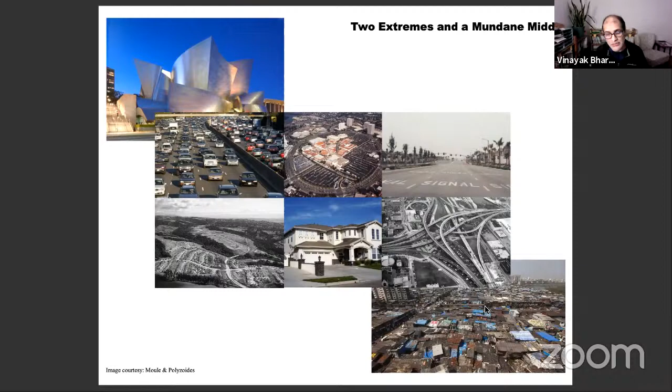So how did we get to this place? If we're sensible architects that went to schools and studied and got degrees, even the greatest universities in the world, right, produced all these wonderful architects, how the hell did we get to landscapes like this where nothing is sustainable, nothing is ecologically meaningful? This is a toxic landscape. And the worst part is it even happens in the most regulated societies in the world. It's not happening by accident in some poor countries.

This is happening in the most rich countries, the most regulated countries in the world, not as accidents, but as legal means. The sprawl is legal. Just think of what I'm trying to say here - this is scary. Sprawl is a legal phenomenon happening because the rules, the laws we have written are systematically allowing people to create landscapes like this that are self-destructive. So if we, as professionals who understand the built environment more than others, have the ability to reverse this, to advocate for the reversal of this, that's incredible. It may be easier said than done in some societies than others, but the process has to begin.

So one of the things we've done in our practice is launch a campaign to talk about these things along with our colleagues. The good news is that for the first time, the whole idea of the architect with a capital A, round glasses and a black robe, is passé. That's gone, thank God. Because what's happening right now is municipalities, at least in the US, Europe, and hopefully India as well, are waking up and recognizing that the way they've done planning, the way they've allowed architecture into the city, is not making anything more than individual buildings.

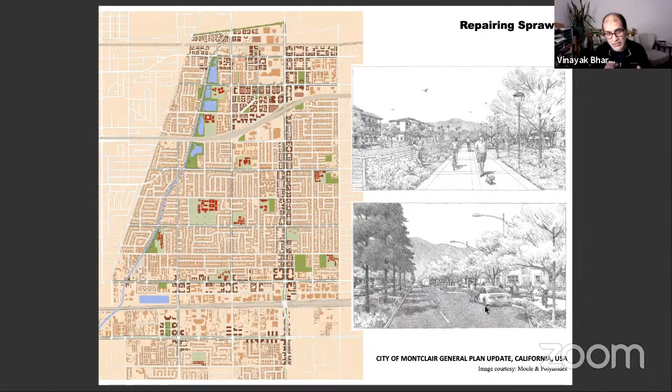This is an urban design vision citywide. I don't want to get into details, but the point is it keeps certain aspects of the city intact. It talks about a green armature for the city, prioritizes projects, and really begins by telling the city that private development is not the way to begin. If you want to transform a city, private development is difficult because it relies on private developers, private money, etc. The way to transform a sprawling, toxic landscape is through changing the public realm, the public space of your city, because that's within the domain of the municipality.

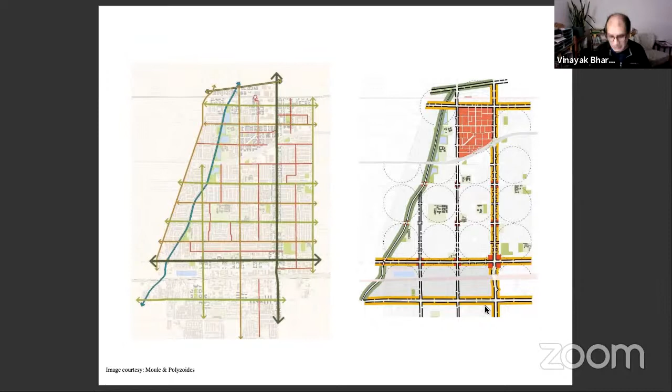So you create a robust street network. One of the things we've realized is that streets, one of the most underestimated aspects of our cities, are in fact the most potent engines to transform the places in which we live. Streets have been destroyed by traffic engineers because they were taught in school that the only thing you need for a street is cars, and they forgot that streets were meant as outdoor living rooms for pedestrians and cars and all the other members of our city, including trees and birds. How can you take the most ubiquitous space in our cities, the street, and make it something incredible?

So here is a simple project. This can happen in any city - there's no rocket science about this. This is a very modest city in California called Lancaster. In 2010, during the economic downturn in the US, they invited us to take this street, their historic street, which you see on top in the photographs.

The dimension of the street is 100 feet from building to building. It has 5 lanes of traffic - note how wide those lanes are, note how empty the street is. It looks like a COVID-19 street during the lockdown. There's no investment, it's very disinvested. So where do we now invest the money they got as a grant to make something wonderful out of it? What we did is something very simple - because there's a grid of streets around it and traffic can be distributed, you keep the curbs, you do not break the curbs because that's where the underground infrastructure is.

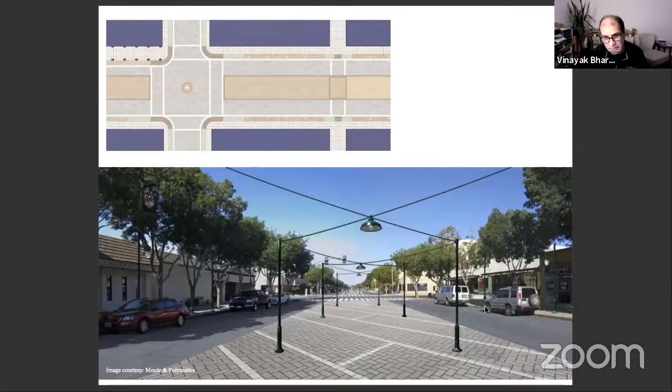You keep the sidewalks, you keep the parking. You take the middle lanes and make it a pedestrian zone which is porous, because the water can now go into the ground. You harvest the water, add lighting, and make it a shaded zone since it's a very hot climate. This space can transform into something as wonderful as this.

Now, this is nothing new. This has been done in India. It's happening everywhere—that's the good news.

The most wonderful thing about this project is that after we finished our design, the city took it and implemented the whole thing in 8 months.

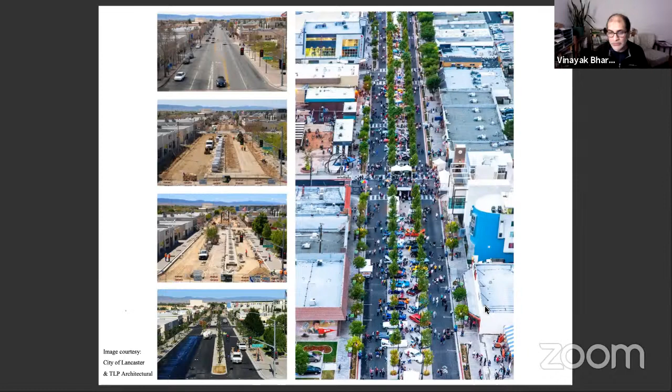This is a very important point, because none of us in our firm can claim sole credit for this project. We did one part of it, but the other part was the implementation and follow-through. My point is that the eventual success of urbanism doesn't come from an architect or a designer alone. It comes from the collaborative process of important visionaries who follow through and carry the project forward, keeping the core ideas of a vision alive.

This is the Christmas celebration and the weekly farmers market that today happens in this street. And the other beautiful thing that happened within 3 years is that because this street became the iconic heart of the city, developers came wanting to build housing here, people wanted to live here, and the city invested $14 million and reaped back more than $300 million of investment.

Investing in public spaces is not just about making places alone. It is a wonderful economic strategy. It's a social strategy to bring people together, because it's also a way of making cities inclusive. When you have public spaces like this, and design housing intelligently around it, people of different income groups can now stake a claim in a common space.

Whether I own a Maserati or I'm living in a small apartment, it doesn't matter what my income is. It's like a beach in Goa—when you go to the beach, it doesn't matter if you're rich or poor, you enjoy the beach nonetheless. Giving people the same right in a city through public space is of the absolute essence of making cities more equitable.

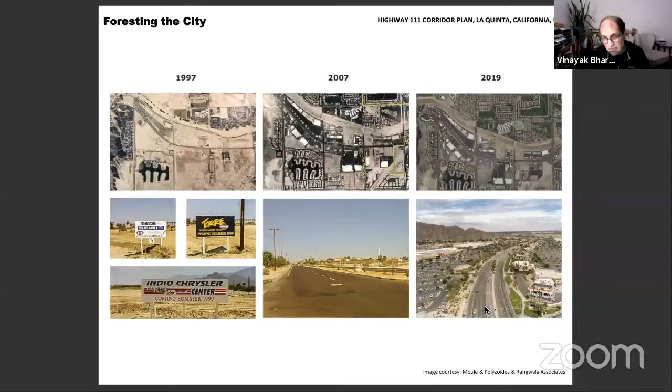The second issue is about ecology. You have sprawling landscapes where the ecological index is absolutely minimal—these are landscapes, particularly regional highways that connect one place to another. This is a classic case showing the chronological advance from 1997 to 2019 of how the presence of a highway attracts boxy development with parking lots in front of it, destroying the landscape to make it a sea of asphalt.

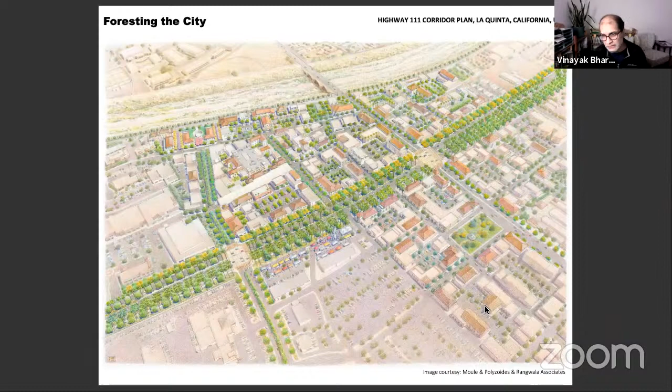So the other important agenda, which some of the more interesting landscape architects today have called 'foresting the city'—a term I love to use—is saying instead of the forest being outside the city, let's think of the city as an extended park, an extended forest. Taking these conduits, which we've thought of only for mobility, and planting them with incredible trees, making them boulevards and wonderful parkways with trees, birds, local ecology, and harvesting techniques becomes of absolute essence. They become the scaffold around which sustainable development can happen.

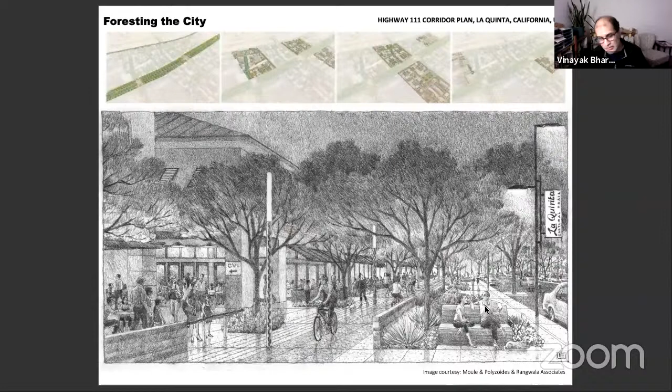Here are examples of this. Now the same is true when we think about freeways. Across the US, there is now a concerted campaign to rethink the damage that freeways have done in our cities.

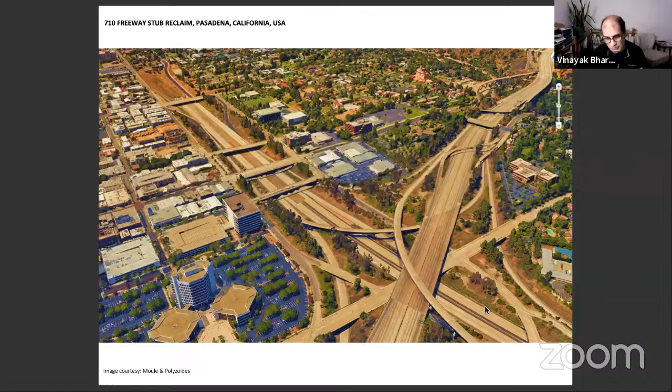So this was a project where like-minded citizens in Pasadena, not architects—though some of us were—came together and met for about 3 weekends, creating a vision for this place. A simple diagram produced in a weekend said: instead of having a crazy cleft, you can take traffic through this place by making it a magnificent boulevard, bring in new development, and stitch the city together. Through the concerted campaign of this neighborhood association, we actually managed to block the freeway from happening.

So citizen activism, combined with all the expertise we bring as architects and economists and other fields, can actually be a potent tool for changing the way we think of how we live in our cities.

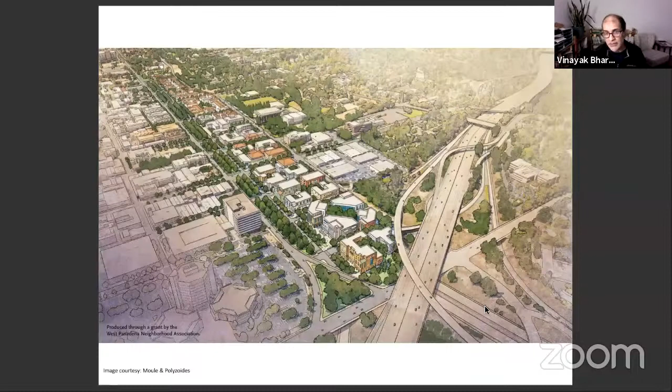The idea of foresting the city also has implications on conservation. This is a project in Panama. It's a very interesting project because when we think of conservation, we often think of it at various scales: the scale of the building, the scale of a district. What about the scale of an entire historic city?

Now, when you think about it as development on its own, that's one way of thinking about it. But the other way of thinking about it is that it's an extension of the city. In other words, if you can really think of a pilot project that can become a model of how to extend the growing historic city, and then becomes a model that you can replicate, not in form but in strategy, now you can create something wonderful.

So what we did is we started this exploration through landscape, not through architecture. We brought in an ecologist and a landscape architect, and we documented everything that was going on in terms of the ecosystem of this historic town.

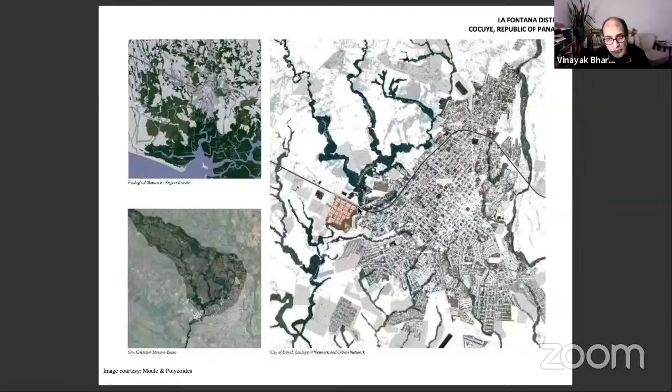This is the development in the picture, and you can see that a ribbon of forest goes around here. So we had a choice whether to obliterate this forest or whether to keep it. What we ended up doing is we kept the forest, obviously, and we converted the highway into a massive boulevard. So I'm talking about foresting.

And what you see here is a self-sustaining district, which has a park, a park, a park, and a fourth park in the forest. It has a promenade that takes you through to the heart of the town center.

And the advantage of doing this is you can now phase this and build it as the first phase, where everyone has a piece of this. You can phase that, you can phase that, you can phase that.

All of this is based on traditional precedents of urban design. This is not rocket science. We visited Charleston, we visited some beautiful pre-war towns designed by the Spanish. We looked at some of the lessons, and that's the inspiration for this place.

Now, the most beautiful thing about it is we then began to look at the forest. Our landscape architect went into the forest and documented all of the trees that were native to the flora of the forest. And what we did is that all the streets you see here are now carried on as designs that extend this native landscape into the town.

So what you're doing basically is creating street sections and public realms, like I showed you, by bringing this into the town. And the result, of course, is that now you get a development that is not the kind of sprawl that you see here, but a development that is self-sustaining because it has retail right here, it has an office program right here, it has a residential neighborhood right here. In other words, if you live here, there's no reason for you, unless you really want to, to get on the freeway and go into the city.

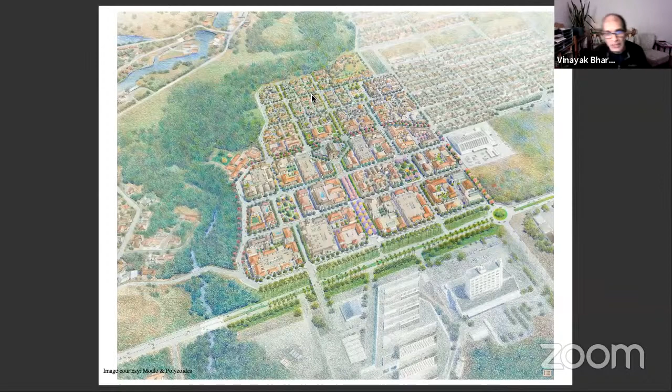You can have all your daily needs within the idea of this district. It's a walkable district. Now imagine a model where this historic city has neighborhoods that are self-sustaining all around it, with streets that bring in the natural flora, stitching broken nature. So this is a model. It's actually broken ground, and we hope that they will carry this idea through.

What he wanted to do originally, as they always do, and you see this happening in all parts of the world, is destroy everything that was in there, divide it, subdivide it, sell these, make the money, and go away. What we managed to do, and a lot of credit goes to the client here, because eventually you need a person to make these decisions, is we eventually managed to give him the same number of units, but actually clustered in the form of hamlets, while keeping the forest and the agriculture completely alive.

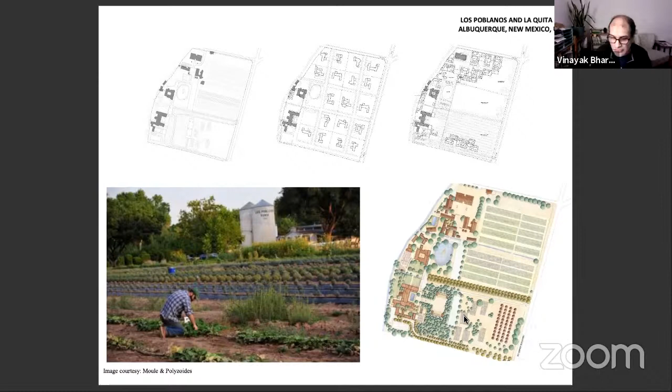Now imagine estates outside all our cities, particularly in India, because you have so many beautiful ones with plantations, etc., doing this, where you actually bring in development because that helps keep the economy going, but you do it in a way and form that creates covenants where you will preserve nature and agriculture for posterity. This is a choice we have. It is not an easy sell, it's not business as usual, but we must try to convince people to actually do it. And that's the aerial of the estate, as you see.

Transit. Many of you know this. It's a wonderful thing. It's picking up in India beautifully. Transit is a great blessing for us.

There's a lot of talk about what's going to happen to transit during the COVID conditions, but my answer is very simple. You and I can afford to sit in our cars and go wherever we want, but there are millions of people all over the world that cannot afford a car. Transit is their only option.

So imagine taking transit as a very important catalyst in the city and taking our transit nodes, whether they are bus stops or train stops, and investing money in these places. Why? Because transit stops are places where the rich and the poor, the old and the new, the children and the older generation, they'll all come there in some place or the other. So why would you not make these places the most beautiful so that everyone can enjoy them?

I mean, this is such a simple thing to do. It's happening in so many parts of the world beautifully. So transit-oriented development, or whatever you want to call it, essentially is about visioning places around transit stations that are absolutely beautiful. This has implications on urban design.

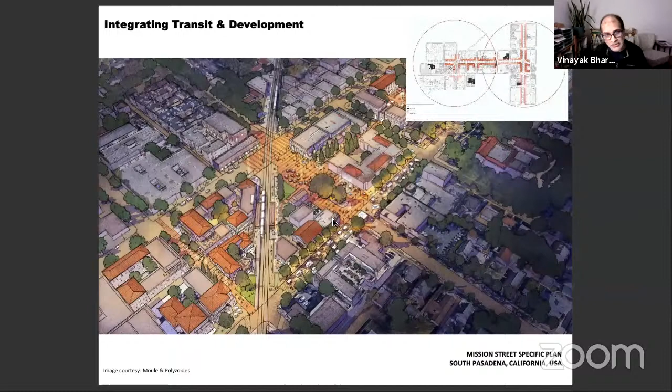This is an urban design proposal for one of the transit stations in South Pasadena in an American city, but it also has implications on architecture. Because what you want to do is also densify housing and mix of uses next to the transit station, because the whole incentive of living next to a train or a bus stop where you don't have to rely on your car is a wonderful thing.

So if you can bring in density in forms that are contextually responsive, that they don't obliterate the surroundings, they don't destroy the character of a historic neighborhood, etc. This is a project, a very difficult project we did about 10 years ago now, where the existing zoning of this city was not ready for transit-oriented development. So the buildings were only supposed to be 4 and 5 stories tall around a transit station per the zoning rules of the city.

What we said to the city, and these are graphics we had to show them, is if you do it at 4 and 5 stories per your rules, you're going to get a building that looks like this. Now this is not urban design. This is some architect coming and making what we call a pancake building. It's a stacked building which maximizes your FSI, and then you create courtyards to bring in light. And then, depending on how talented you are as an architect, you put all kinds of games on it and some windows and some tricks, and you call it architecture.

If you're doing urban design along with architecture, you are now looking at what's around it, what's behind it, what you want, what's the pedestrian scale, how you want to create mixes of uses—all that kind of stuff comes in.

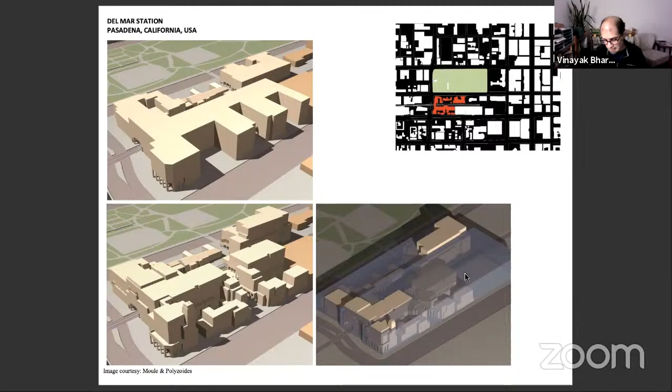In this case, we got as many as 10 variances on this project, and here was the other complication: the train lines went through the middle of the project.

When you have a train line going through the middle of the project, this amount of land is actually owned by the metro authorities. It is not owned by the developer. The developer only owns that and that.

Because of the amount of parking, we had to go 4 levels underground. This is a very unique moment in the construction of the project—you can see the parking being dug. It's a very expensive proposition because you cannot dig the whole thing. You have to leave this intact, which means you have to shore here and shore here as well.

Note that the train was going to be active in 1.5 years. So construction of the little tunnel, the gateway through which our train was going to pass, is the only portion of the building that spans the tracks. We are constructing it along with a parking garage.

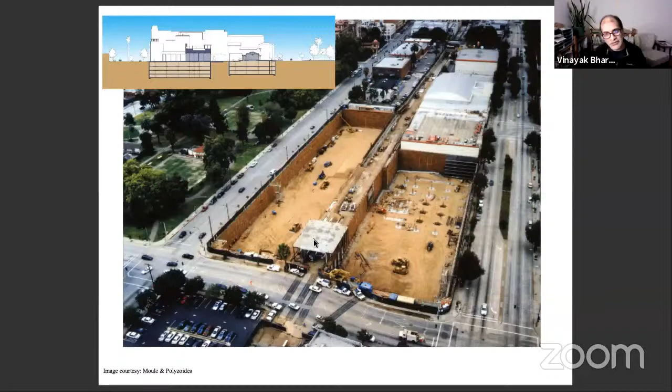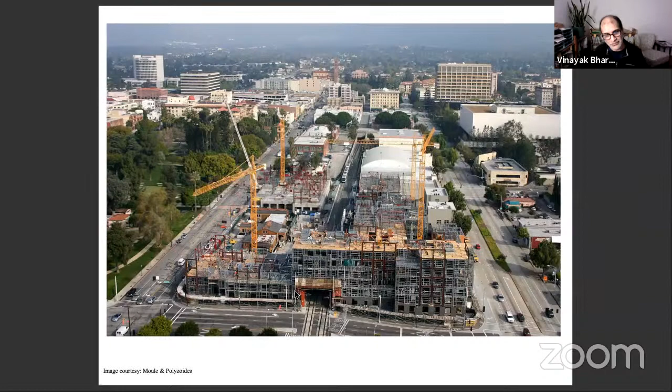Here is a shot where the train is active and the steel is being poured around, and the building is under construction. You can see that the tunnel, that portal which was being constructed originally, is now completely finished. Finally, in another year or so, the entire project was built.

What is interesting about this project is that this little building you see here was the original station in the 1920s where people got down on this train track. I don't know if you know this, but Los Angeles, surprising to many people, was one of the world's most important transit cities in the 1920s and 30s. It had 1,000 miles of train tracks.

By the time the freeways began to come in, with the rise of the automobile, systematically these train tracks were dismantled and replaced by freeways. So all of these historic train tracks became abandoned places, and this station, which once had so many memories in it, was lying in ruins.

So what we ended up doing as part of this transit-oriented development is taking this building—we moved it to the park, dismantled it, restored it, and brought it back as a restaurant. So this is a historic project that conserves this building with 350 units of housing right in the middle of a train station around a plaza.

And that's the building from the outside. You can see the station going through. These are all apartments where people live—there's a train going right through the building. And here's the restored project with the plaza, with the trains whizzing past.

Now we come to another subject: affordable housing. 1.2 billion people don't have adequate shelter. What do we do about it?

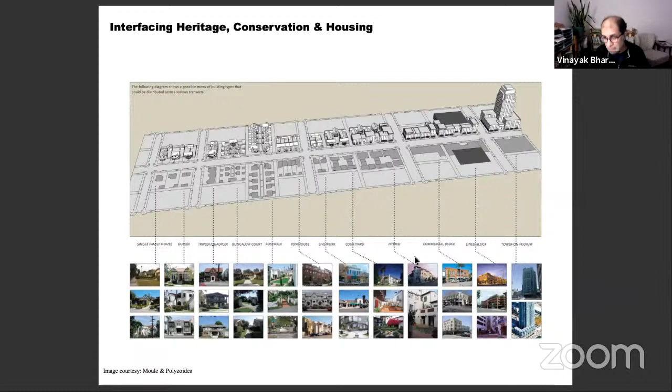I want to take you through some projects that straddle conservation, affordability, everything. The first one is really about saving old houses.

If there's one aspect of architecture about creating things anew, there's another aspect that's simply about not letting build-and-scrap practices go on. We live in a world where we cannot afford build and scrap - there's too much waste already. So if you have houses that can be salvaged, that can be moved, if houses have to be demolished for new development as cities upzone themselves, can you take these homes, move them to other places, and really make something out of them?

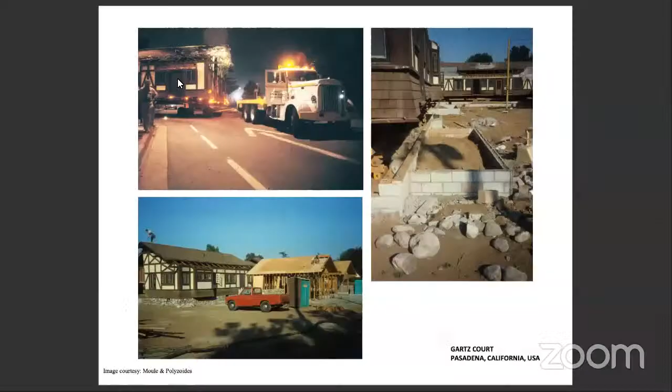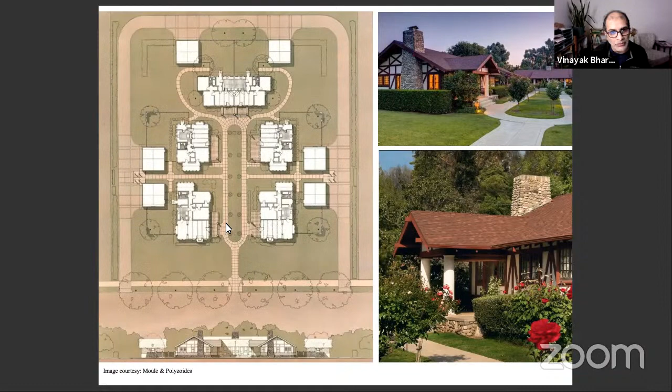This is a historic project where, in the night, houses were taken on a truck to another site and put on new foundations. There are 6 homes, 6 bungalows made out of wood. Garages were added, yards were added, and they're arranged in a simple configuration around a common court. The result is an absolutely simple project that can house people right in the middle of a single-family neighborhood.

So what could have happened didn't happen, because you salvaged it, added chimneys, restored this project, and made new housing out of it. My point is that new housing is not new in terms of design alone. New housing can establish continuity by salvaging historic material and recasting it in new forms. The same can be done by amalgamating it with new design.

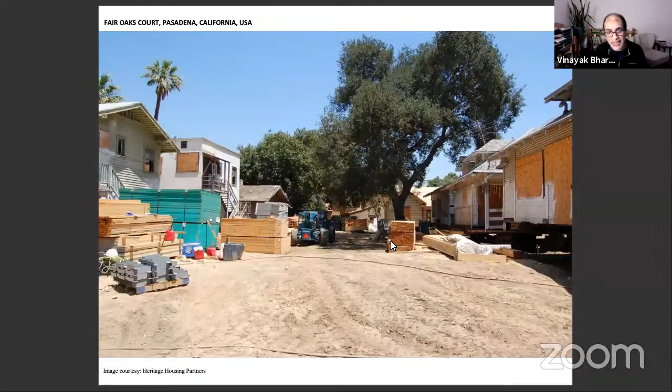Now, this is another case where existing houses on a site were maintained, kept, and restored at the back. These houses you see right here are right there, all restored around a common court. In front of them, new housing is built from scratch, reviving the best traditions of Southern California houses in the craftsman style.

So this is new, this is old, and the amalgamation creates complex housing, because you now have people who are low income, mid income, workforce, etc., living on the same site and meeting in the same place - which is what inclusiveness is truly all about. Inclusiveness is not about taking the people who are poor and shoving them into one part of the city.

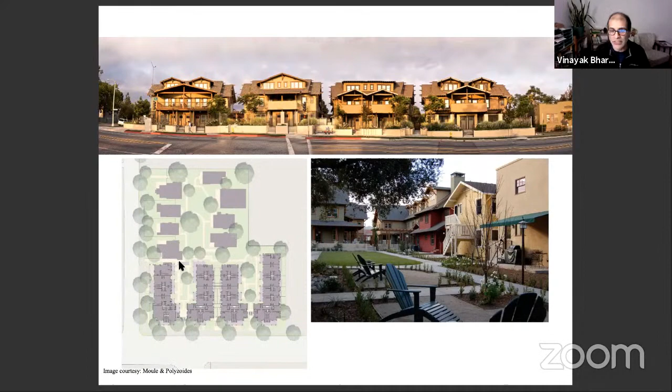Inclusiveness is about creating housing where people of different incomes can live together, sharing the same space. The third idea is to revive traditions based on climate and ecology.

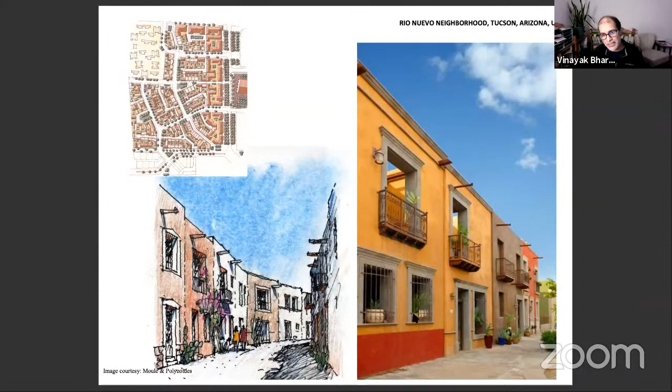So what we ended up doing here is we told the builders, we're going to design with you, with the production builders, just the facade of the street. The architects can design the house behind it. You can do whatever you want, design the most creative house you want. But the production builders should come together and work with us to create some semblance of what the street might become. So this was a pilot where we built the walls, and behind them the architect actually designed the homes, and the result is actually quite wonderful. A few of these houses have been built, and you can see the exterior facade is all that the urbanists actually control, while the architects end up filling it in with all kinds of creative housing.

We now come to a beautiful typology in Southern California called courtyard housing. Courtyard housing is not new to India. In tropical climates, the incredible wisdom of living outdoors has been known to us forever, so this is nothing new to many of you. But it surprises me that we forget many of these things.

I don't have to remind you, some of the most intelligent architects of the past generation in India reminded us of this constantly in their work and in their writing, and they need to be acknowledged. So this is nothing new to many of us.

But nonetheless, in Southern California, for example, there's a beautiful tradition. When the Spanish colonized Southern California, they brought with them Mediterranean precedents. One of the precedents was, instead of living in buildings with corridors, where you go into a lobby, up an elevator, cross a corridor, and into a unit that is not ventilated, you actually have a building with no corridor. You arrange the units so that you have courtyards that are not just spaces between buildings, but actual gardens that are outdoor living rooms where you spend most of your life.

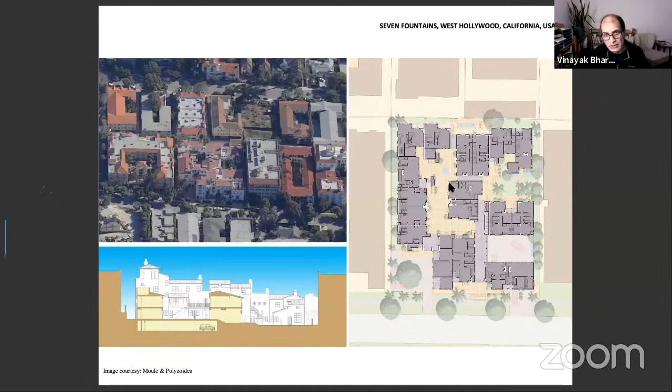The result was wonderful, I think, because we managed to create and revive a substitute to what could have been a conventional apartment building. This building is obviously a homage to the great Mediterranean traditions of Southern California. A very simple building of stucco homes now broken into individual masses. Instead of creating the image of a large single building, you break it into a townscape. That's the whole idea—you break this into smaller units. That's the beauty of the villages that we love, at least I think.

This is the entrance. You walk through this passage, and these are the courtyards. This is just one of them, where the courtyard is an outdoor living room. You have a place, a fireplace where you sit down. You enter this unit straight through the ground, or you climb up the stair to go to your unit above.

Again, a different typology that now eliminates the idea that stacked housing is the only choice we have to live today. The other tragedy—and this is a science that can be applied at any scale.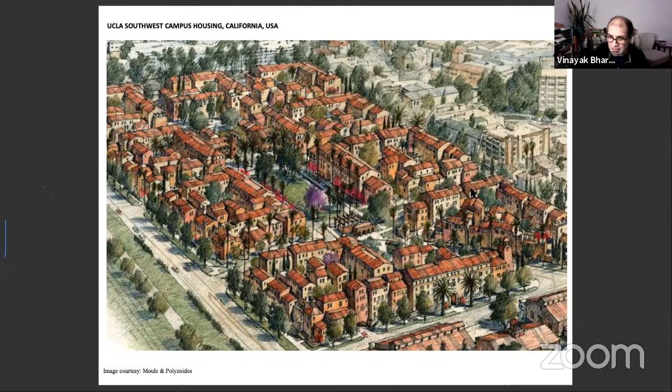Now, these are all things that are known amply in India, right? Because we don't have the energy, we don't have air conditioners, poor people cannot afford it. So these sciences exist in India. Some of the best housing projects in India have done this so beautifully. So these are things that need to reach the least common denominator of architecture. It shouldn't be a handful of elite architects talking about this. That's ridiculous. If only 2 or 3 people talk about this and we worship them, then nothing has come out of it. What we need to do is take these sciences into the schools, teach students about why these things matter, how to craft these ideas, because that is the way we're going to transform the way forward.

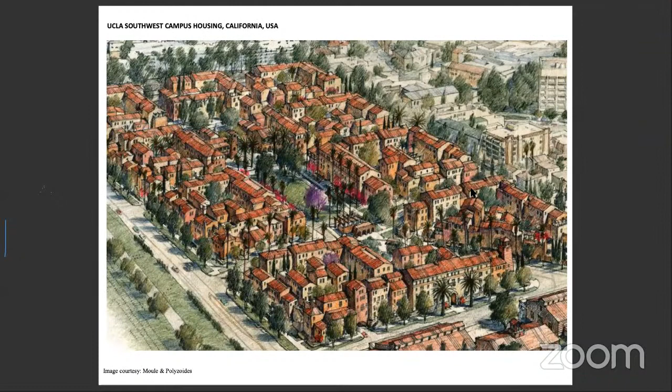My second book was on Asian cities. When I came to the United States, I began to realize that the paucity of scholarship on some of the oldest cities in the world was appalling. I mean, think of the great irony. For those of us that had the privilege of studying in different parts of the world—I can speak for Poonam here as well—you go to the West and you begin to realize that there is so much scholarship on Western cities, but the oldest cities in the world are not in the West. The oldest cultures of the world are not in the West; they're elsewhere. The oldest heritage in the world is not in the West, it's elsewhere. And yet we don't have enough scholarship on it. So there are now, of course, many scholars who are thinking of this, and that's a wonderful thing. And obviously, there's also a geopolitical shift, and Asia has come to the forefront. Latin America has come to the forefront, so that's wonderful.

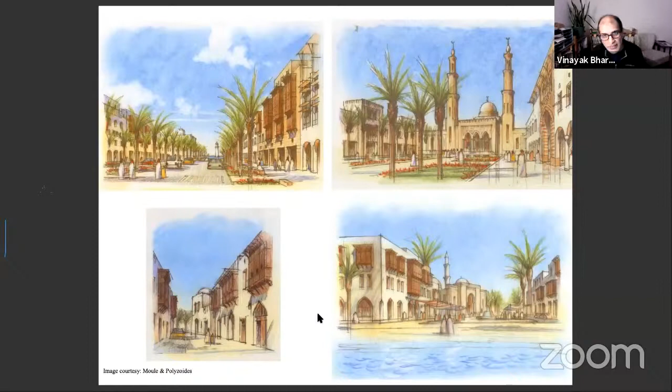Production housing is one of the debacles of housing, where cheap developers take the same house and multiply it for acres of land. But you can actually shift this rubric very easily.

We tried to do this in Dubai. This project did not get built, but what we tried to do is, I remember going to Dubai and asking my friends to take me to see what Dubai was before it became a mega city. My friend took me to Bastakia, the last surviving fragment of historic Dubai, where there are 20 or 30 houses with cooling towers. I was completely taken by the charm of these houses.

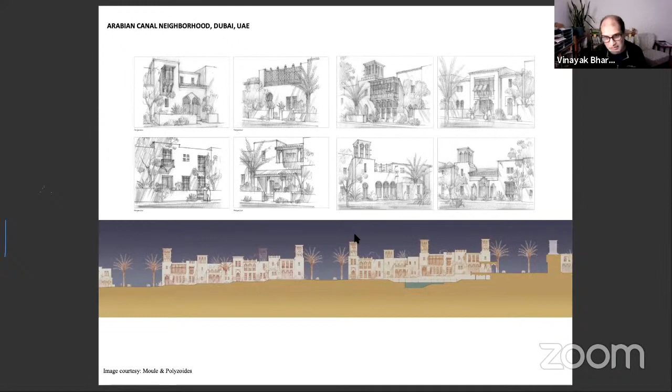So we tried very hard to bring some of these ideas into housing. Here was production housing: all these houses you see have the exact same plan. All we've changed is the outside. They all have cooling towers in some form so the air escapes out. When you bring them together, you get streetscapes and townscapes that revive and keep a link to a past these amazingly wonderful places have forgotten. Not only are these buildings simple and sustainable, but they take you back to a side of the story that has been completely obliterated, for what reason I do not know. I'd love to discuss this with all of you today.

This is another incredible project we did for the Bohra community, a minority sect of Islam, a wonderful Orthodox sect. We had the privilege of being invited to compete for one of their campuses in Nairobi, Kenya. I don't want to get into details, but what's beautiful is that the mosque is the center of the campus, right in the middle.

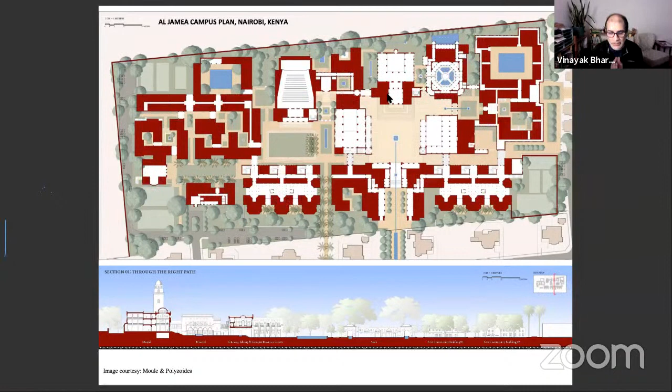These are the dining halls, the classrooms are there, and because of gender separation, which is the most rigorous and important thing for them, the men's dorms and classrooms are here, the women's dorms and classrooms are here. The men walk on the ground to the mosque each morning, while the women come from the top through a bridge to the mosque. It's an incredible way of respecting the cultural genomes, meeting them where they are, and creating a language of architecture that is entirely theirs. We worked with many community members to craft this architecture rather than abstracting it.

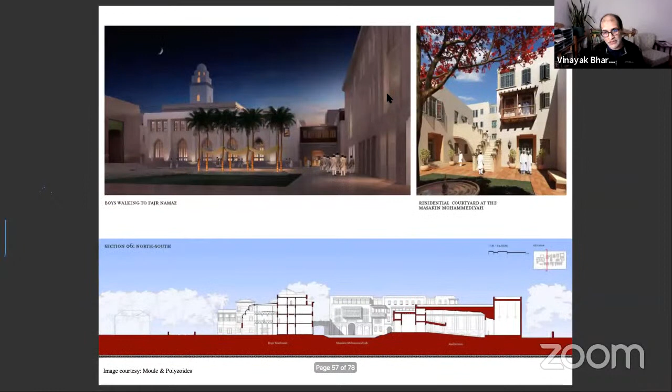Fifteen years ago, I had a student from Persia who spoke Farsi. Our collaboration resulted in a wonderful study where we rediscovered this wonderful city called Yazd, the epicenter of the Zoroastrian faith, where the fire of that faith burns. I knew about Yazd because it was a World Heritage Site, known as a city of wind towers. But what I didn't know, which we excavated and wrote a paper on, is that the wind tower was essentially the end of a long regional infrastructure called the Qanat.

The Qanats were subterranean water channels that brought water from the aquifer of the Zagros Mountains under the earth into reservoirs called Abanbars, then into the mosques, and then into the houses. This was an incredible piece of heritage that existed, yet for years it went completely unnoticed. Finally, it gave me such happiness to find that three years ago, UNESCO recognized the Qanat as a World Heritage Site.

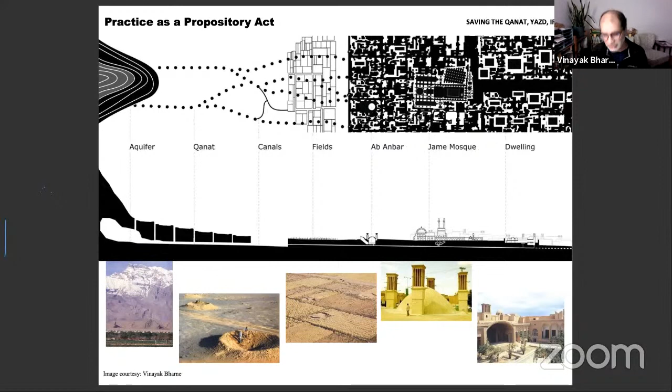There are so many such vernacular infrastructures that exist all across the world. They do not have a voice, they do not even have an eye—nobody has seen them, nobody knows about them. I'm showing you this because one of the great responsibilities we must carry is the ability to excavate these ideas and advocate for the preservation of these kinds of things.

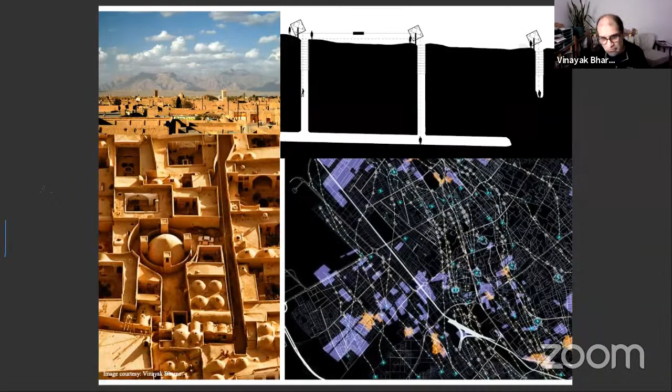So what we proposed is difficult, because the Qanat is hard to preserve since it's underground, and the city has been built over it. Nobody knows who owns the Qanat. Many of them have been completely dismantled, and there are very few surviving. In fact, we did a quick analysis of them.

You can see from the pre-Islamic era to 2011. Till 1979, there were still Qanats existing under the ground, but most of them have now been obliterated. These are the kind of landscapes, the Qanats.

They're surface wells that go underground, connected to beautiful dendritic water channels that exist all around and under the city. But you can't preserve them for the sake of nostalgia, because they don't supply water for the growing city. They are gravity fed, depending on rainfall, because their water comes from the aquifer.

So what we proposed, and this is the idea of practice as a propository act, is that you don't need a client for this. You can just excavate it, propose it, and advocate for it. As the city grows and gets its water supply from 5,000 miles away through industrial infrastructure, you can supplement that with reinventing the Qanat as a grey water recycling system.

What this means is you collect water from all the buildings, as many as you can on a neighborhood basis, using the dendritic network with motorized technology to go against gravity. Initially, water would come from the reservoirs into the houses. Now you take the water from the houses back into the reservoirs, convert the reservoirs into local water treatment plants, and return the water back.

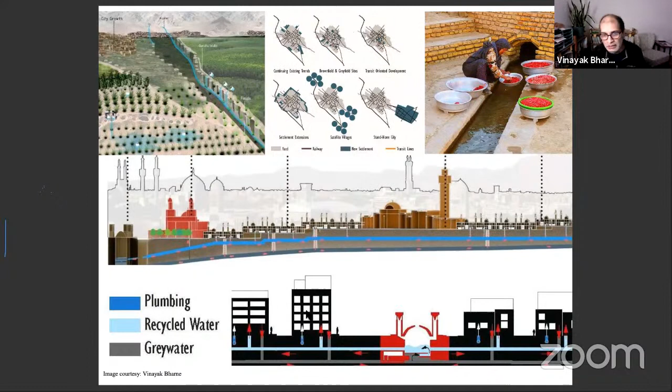Now, the problem is the way we have learned to document them is purely as artifacts. This is my criticism: look at all the wonderful documentation done on the stepped wells of India — it's purely architectural. When was the last time you saw documentation that talked about the entire water system? That's what I'm talking about — recasting the rubric of how we document these places, not as architectural artifacts to be fetishized, but as systems that can be reused or rethought from an ecological perspective today.

Tokyo is a city that has been destroyed by tsunamis, earthquakes, and typhoons time and time again. So my question to you is: how would you live in a city that you know will be destroyed from time to time? That's a very interesting question. Tokyo, more than any other city in the world, is a city I continue to go back to and reflect on, to shatter my own preconceptions of what cities mean, because Tokyo challenges every notion of the Western city.

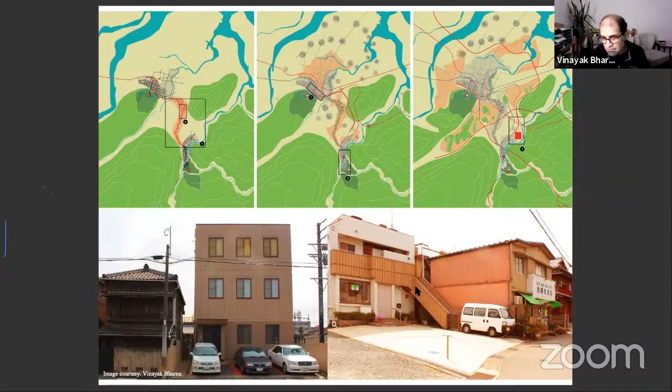And then finally, to return this back to my roots in India, because it is who I am eventually, my first book was on Hindu temples. I was born in a Hindu family in India. My cultural upbringing was shaped by the foundations of Hindu rituals. And as I grew up to become an architect and an urbanist, I began to realize that this beautiful phenomenon that I had seen as a little boy, but had failed to notice its impact on the city, was now beginning to become the most important thing for me.

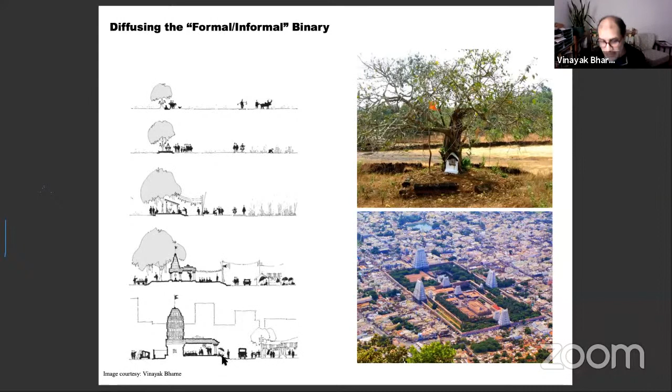So the bottom line is that the teleological end of this incredible metamorphosis continues to this day. We cannot ignore the importance of the sacred, not as a philosophical domain, but as an urban catalyst. Sacredness and sacred aspects bear an indelible influence on the shape of the Indian city, they always will, they always have. To ignore them, to not bring them into the mainstream agenda of planning and urban design, is ridiculous.

Another way of saying it is, we operate in our cities as if the West has all the answers. This is catastrophic, right? If you think about it, all the zoning going on in India right now was borrowed from the West.

It may fulfill one aspect of our cities, but not the other, because there are magical things going on in India and other places that we must acknowledge.

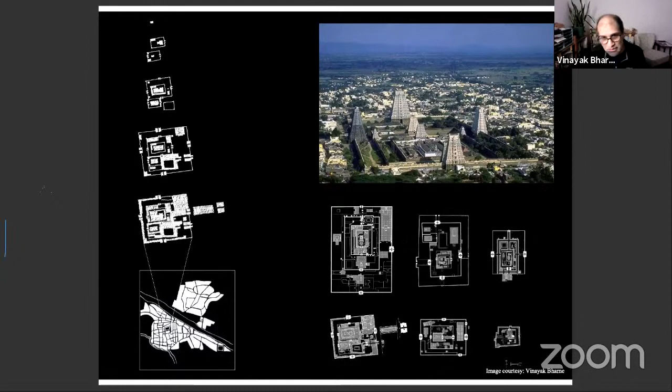And finally, another city that I return to from time to time to challenge my preconceptions of what cities are, which is, of course, Banaras. I've been studying Banaras for 20 years, and I will continue to study it throughout my life, because there's so much in this city that a lifetime may not be enough to understand what it is. But I want to highlight two points in conclusion.

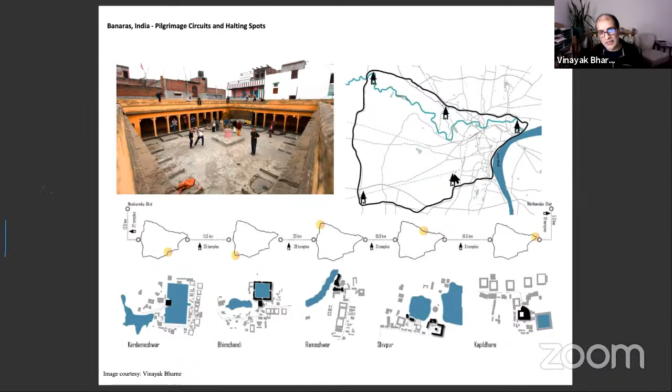All of us architects who go to Banaras focus right here. But if we turn our attention to these spots, which we've been documenting, and we are now creating a scheme for the Kardameshwar spot right here, we begin to chart a citywide strategy that can revitalize the city on its own terms, not using zoning rules, not talking about Western ways of thinking about it alone, but really talking about the catalytic ideas that are of this city truly and nowhere else.

I'll end on this slide, which is the reminder of what Banaras has always taught me: that at the end of the day, every city is experienced completely differently by different people. We as architects, as educated purveyors of shaping the built environment, may think we have the answers, but we may have only the wrong answers eventually, or perhaps answers that are occasionally right, or fully right at one point but not the other.

The only point I'm making is it is dangerous for us to assume, as architects or whoever we call ourselves, that we have the right to impose the solutions of what the future of the city means.

Depending on who you are, you will see the city differently. For some, these slides may seem like an anachronism, that you're being transported to the 12th century, that this doesn't belong to the 21st. But I would argue it is also a reminder that there are so many indigenous modernities happening in front of us right now.

If we keep ourselves as outsiders to a city, coming in with preconceived ideas, a toolkit of some agenda of what architecture is, and plant something there and go, not worrying about the consequences, that's one attitude. The second attitude is quite the opposite: you come to a city like a baby, innocent, pure, with no preconception. You talk to the city, you change the vantage point from an outsider to an insider.

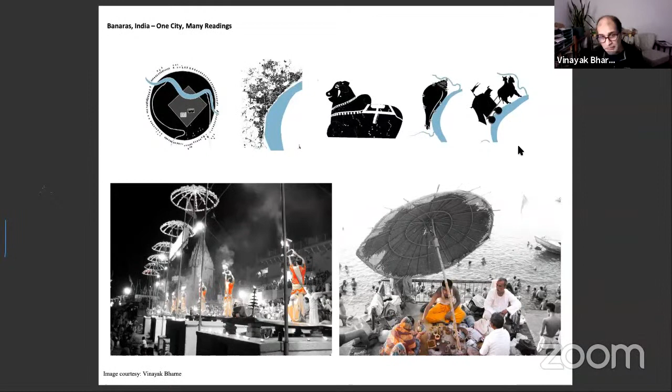You will find so many wonderful answers that you would never find with the place that you came from. I'd end on this slide, which is that at the end of the day, whether we are designers, whether we are architects, however talented we may be, the city is only as successful as how everybody feels about it. The greatest thing we can do in our profession is to encourage awareness of the city.

And I invoke again David Attenborough, in the same way that he has made the whole world realize what is at stake if we don't take care of nature. The thing we have to do, it seems to me, is together, all of us, generate this kind of awareness of why rethinking cities, not architecture, not one building at a time, not some marble monument somewhere, but thinking of the city, its rivers, its systems, its ecology, everything together, of which architecture and the allied fields form part.

You fail many times. You don't know what it means. You're struggling. But that's the beauty of it. You may fall short, you may win. That is not the point. The point is to just continue to try. I'll stop there, and hopefully we have some time to take some questions. Thank you so much.